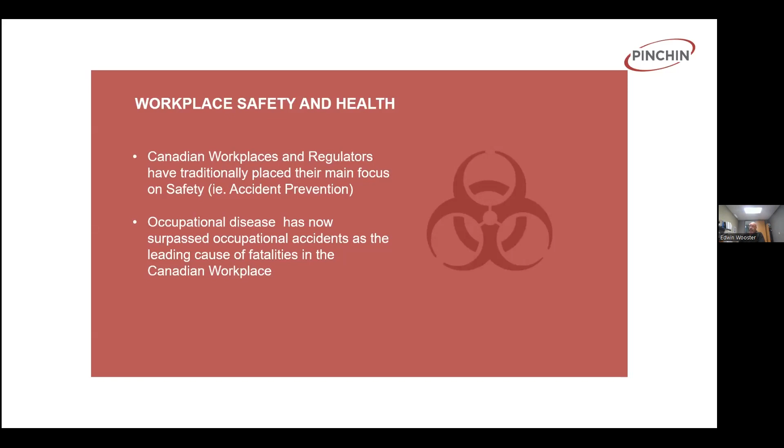And so now we're suddenly seeing a much stronger focus on occupational disease prevention than we've ever seen before in workplaces. In 2017, Workplace Safety and Health combined with Safe Work Manitoba came out with the Occupational Disease and Illness Prevention Strategy. This put a focus on trying to reduce the numbers of occupational diseases in the workplaces in Manitoba.

So from there, we look at regulations in Manitoba. From a workplace safety and health standpoint, we have the Workplace Safety and Health Act W210, and under that is the Workplace Safety and Health Regulation MR 217/2006. And so when we look at occupational disease prevention in the workplace, we're going to be focusing on Parts 2, 6, 33, 35, 36, and 37 of the regulation. Part 37 of the regulation is the asbestos regulation, and that's where a lot of the focus and attention goes when we start talking about occupational disease prevention in the workplace, because that's very specific to asbestos, and there's some very specific requirements under that regulation.

But then we have Part 36 of the regulation as well, which is chemical and biological substances, and that section regulates all of the other hazardous materials that we're going to find in a workplace. And so this is where we fall short in a lot of the workplaces, because under Part 36 of the regulation, anywhere there's a potential exposure to a hazardous substance in a workplace, you have to do a risk assessment and develop safe work procedures. There's requirements for engineering controls and exposure monitoring. And that's because they don't specifically spell out individual hazardous materials in Part 36 like they do in Part 37.

So, Edwin, yes, interrupting. We're noticing a bit of a delay in the PowerPoint screen sharing. It appears on our screen that the actual slide is kind of frozen without seeing all of the details. I'm just wondering if you can advance the slide forward to see if that's going to make it clearer from our perspective. Which slide are you looking at? It says regulations right now, and right now it looks like it's clear. Before it looked like there was one screen overlapping the other, but right now it's fine. Can you advance one more just to make sure that's fine? Okay. Yeah, on this screen regulations is fine, but underneath it, it almost looks like there's a grayish, and that's fine there. Whatever you did, that screen is clear. I moved my mouse. You moved your mouse. Okay. So this screen is clear. The one just before that seemed blurry, almost like a watermark color underneath it. It must have been my mouse. Okay, all good. I think we're good now. Sorry for interrupting. No, it's all good.

Okay, so under parts 36 and 37 of the regulation, in order to comply with the requirement to protect worker safety and health, there's the need to assess risks to workers, establish safe work procedures, and conduct exposure monitoring where there may be an overexposure to a worker in the workplace. There's a requirement to implement effective control measures to protect those workers. And then there's the requirement to conduct additional exposure monitoring to ensure that the control measures are working effectively.

Now, this is where things get a little bit fuzzy for a lot of employers, because it doesn't tell you how to go about doing this, and it doesn't talk specifically to the details of what we have to monitor for, or how frequently we have to do that. So this is where you end up with the need to bring in a competent person that understands it in those situations.

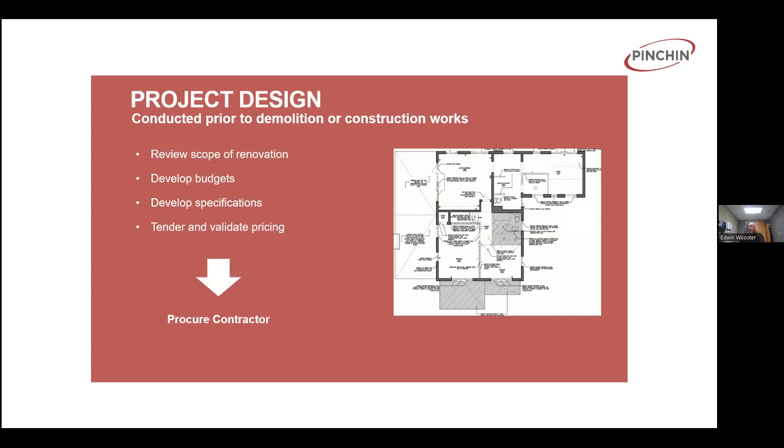And then once the work starts, MR 217/2006, Part 37 says that prior to any work that could release asbestos into the atmosphere, you have to actually notify the Department of Workplace Safety and Health at least 5 days before the abatement starts. And this is probably where some of you as contractors might be all of a sudden getting questions from Workplace Safety and Health going, was there a pre-renovation assessment done on this job?

Because what's happening is when contractors are pulling building permits for jobs, Workplace Safety and Health is being notified of these projects, and they're starting to follow up to find out whether or not these pre-renovation inventories have been done. So this is probably where some of these questions are coming up going, whose responsibility is it to have an inventory done, and what needs to be included in it?

Because all of a sudden contractors are being awarded jobs, and then Workplace is asking them, well, was there an assessment done? So Workplace is catching a lot of this through the demolition permits that are being pulled, but also when abatement contractors are putting in their 5 days notice prior to starting any projects.

There's the requirement to remove the hazardous materials in a safe manner, as well as to develop safe work practices for handling the asbestos, which means you have to have safe work procedures on site and developed for this work.

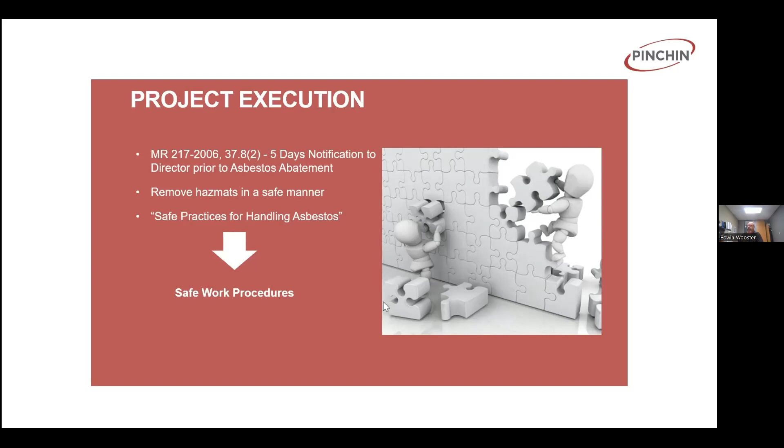Validation: you want to monitor the work to make sure it's being done in compliance with the procedures. This involves verifying the scope of work. It may involve air monitoring to make sure that the work is being done safely, and then verifying waste handling.

So, some of the concerns we've heard raised: there were a couple of projects where a demolition contractor actually got caught hauling hazardous waste out of town and dumping it in a farmer's field instead of hauling it to landfill to be disposed of properly. So tracking the waste, making sure it's actually going where it's supposed to, is an important part of this as well.

So this is where having inspection reports done during the abatement, documenting waste with waste manifests to actually show where it's going out, and even having a closure report at the end of the job that summarizes that everything was done correctly can save you a lot of grief.

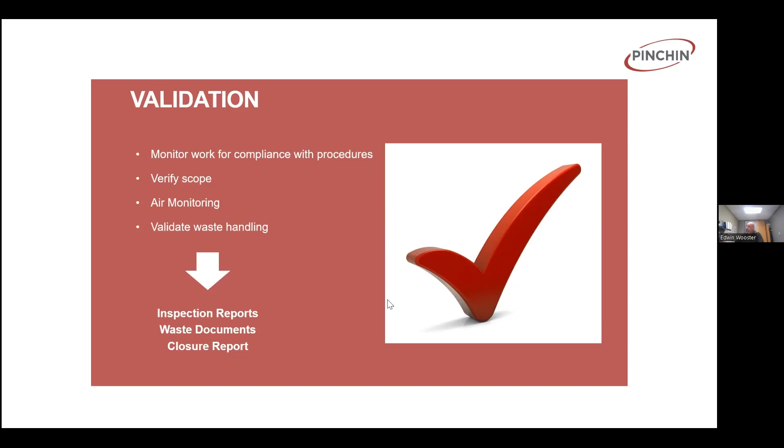So when we talk about abatement on renovation projects and some of the things that you need to be concerned of, asbestos is the big one, because Part 37 of the regulation specifically spells out asbestos and that you have to have an inventory done. But when it comes to the other hazardous materials that we're going to encounter in a workplace, it's going to be lead, whether it's paints, primers, in the bell and spigot joints, you've got the lead gaskets where it's poured in there as sealants, lead acid batteries and emergency lights. These are all things that we would be looking for.

Silica, it's in so many different products. Silica is the most abundant mineral on the Earth's surface. So we find it anywhere there's sand, gravel, concrete. It's in drywall, it's in plaster, it's in acoustic ceiling tiles. We encounter silica in so many different products. So that's another thing that we need safe work procedures for.

And it's one of those products that gets disturbed on a lot of construction projects. And there isn't a lot of monitoring that's being done with the silica. So there's a lot of exposures that go on with silica that slide under the radar. Mercury, it's found in fluorescent light tubes and in thermostats in buildings. So we want to identify those before any demolition occurs.

So when we talk about asbestos, some of the more common materials we're going to encounter in buildings are going to be fireproofings, floor tiles, ceiling tiles, sheet flooring, texture coats, mechanical insulations. Vermiculite is a huge one. Everybody thinks about residential attics, but hollow core concrete block walls are a common place where we find concealed vermiculite. And vermiculite can generate some very high exposures when disturbed in an uncontrolled manner. So it's something that we have to be very, very aware of when we encounter it in buildings.

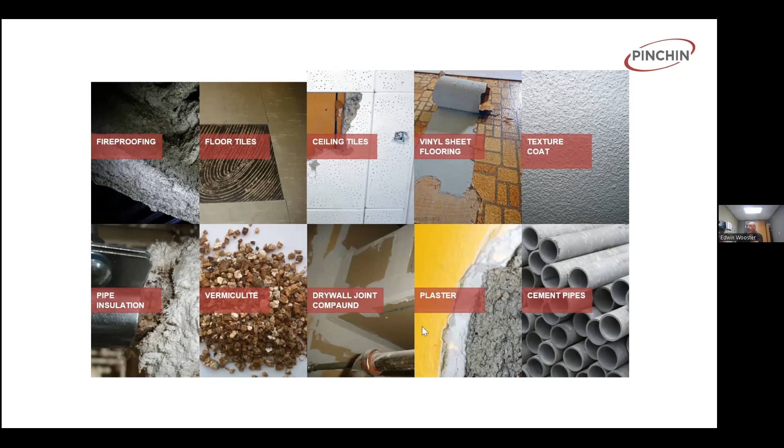Drywall joint compound, plasters, asbestos cement pipes, siding, and those sort of materials. In addition, mastics, glues, caulkings, and adhesives are all going to be suspect. Stucco finishes on the exterior of buildings, brakes and clutches, gaskets, ceiling tiles are all sources of asbestos that we find in the buildings. And you have to be careful because the guidelines say that at minimum you have to do an asbestos inventory for any building built before 1990, but the regulation actually states any building that may have asbestos in it needs to have an inventory done.

So from a management standpoint, we've seen some fairly significant enforcement on the older buildings constructed before 1990, but from a pre-renovation standpoint, the federal government did not ban the import and the use of asbestos in buildings until January 1st of 2019. So any building built right up until 2019 could legally have asbestos-containing materials in them.

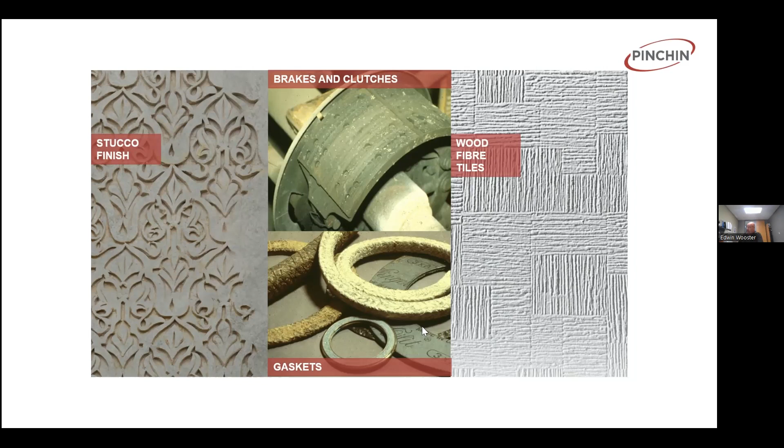Lead was added to paint for durability, and it adds pigment. Exposure to lead can affect brain development and damage primary organs. Activities that can cause exposure include building demolition, sanding, grinding, torching of steel, welding, and abrasive blasting. And it's in a lot of different coatings.

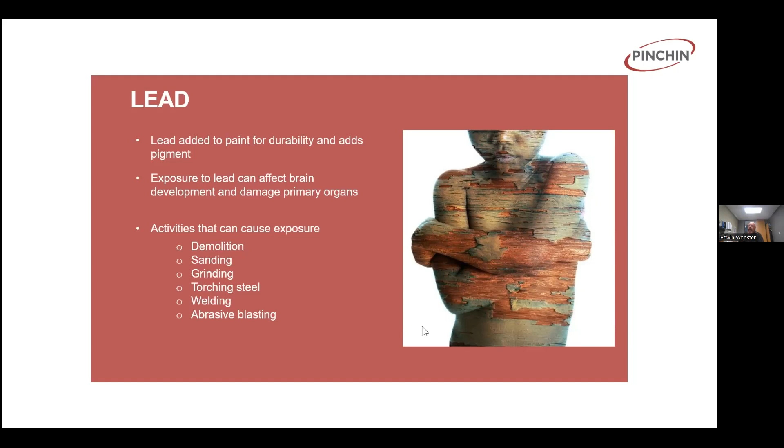When we look at lead in paints and coatings, this is another material that is misunderstood because it is still legal to have lead in industrial coatings in certain applications. So we find primers on structural steel, we find coatings on industrial buildings that still have some fairly significant levels of lead in them, even in newer coatings. So it's something that people are not necessarily always aware of.

Mercury was found in control switches, thermostats, pressure devices such as manometers, thermometers, and fluorescent light tubes. The challenge is liquid mercury is very difficult to clean up and it's very volatile. The mercury fumes are readily created under normal temperatures, which means that when they are disturbed in a building, it's hard to clean them up. They vaporize really easily, so the potential for exposure can occur quite quickly.

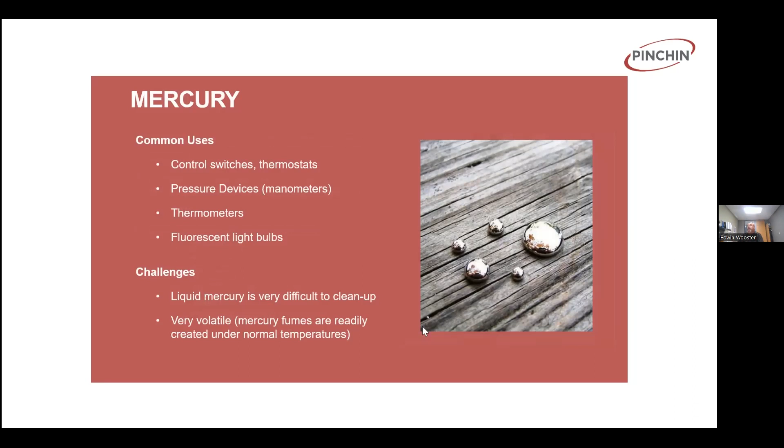PCBs were used in capacitors and light ballasts, and as fluids in transformers. We find it in hydraulic fluids. It was used in lubricants and caulkings. It was non-conductive, it transferred heat well, and it was a good plasticizer. So as I mentioned earlier, it made for pliable caulkings and adhesives.

And then some of the other materials that we're going to find. Silica. There's not a construction site anywhere in this country where you're not going to encounter silica dust. Silica was a big one. There was a fairly significant project in the news last week where there were issues with silica on a media blasting project.

Mold can be found in some of the newer buildings, right up to the older buildings. Anytime you have a water loss or any time building materials get wet, there's going to be mold issues or potential mold issues.

Droppings, this is another one. We get into derelict buildings, you're going to have pigeons and bats and rodents in there, but even newer buildings. Right now, fall is coming. I live in a rural area, and I've noticed this year there were a lot more mice in our community than we've seen in past years. With the colder weather coming, they're going to be looking for warm places to go. All a mouse needs is an opening the size of a pencil eraser to push through. So it doesn't take long to end up with rodents in buildings, and the deer mice carry hantavirus.

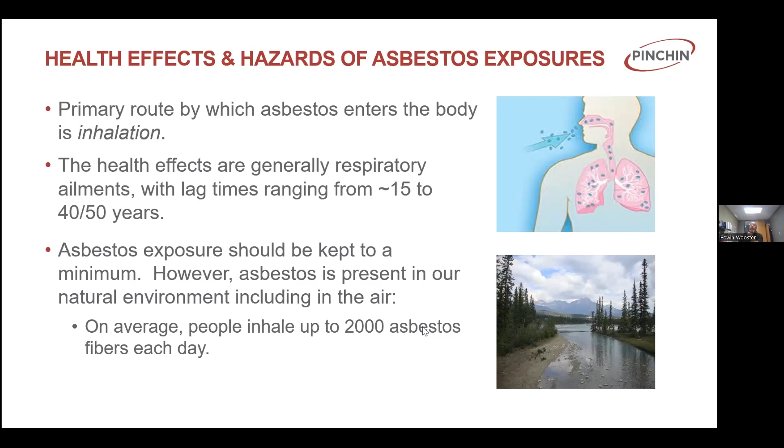Lead exposures can have negative effects on various body systems. They affect the nervous system. They can cause permanent nerve damage, tremors, irritability, depression, and even death. It can affect your bone marrow and your circulatory system, causing anemia and high blood pressure. It affects your kidneys. It can cause kidney damage and kidney failure, and causes issues with both male and female reproductive health, resulting in things like infertility, spontaneous abortions, birth defects, and sexual dysfunction.

When you become exposed to lead in the workplace, the lead circulates in your bloodstream for approximately a month. In that time frame, a certain percentage is going to deposit into your bone marrow. A certain percentage is going to get deposited in your soft tissue, your liver, your kidneys, the different organs, and they will house that lead. The bone marrow can house lead for over 30 years. Your organs can hold on to the lead for about a month. And then after that, your kidneys filter the lead out of your bloodstream and you urinate it out of your body.

Edwin, I'm just going to pause you right there. Your screen again is kind of locked up. Yes. So if you can just move... excellent. Thank you.

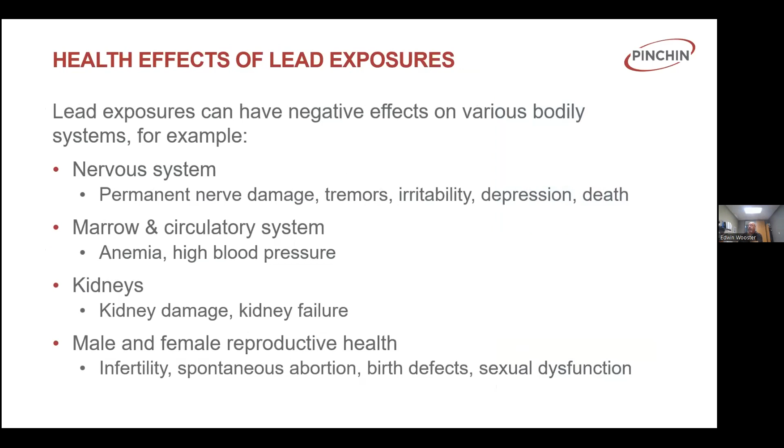So those are some of the concerns that we see with lead exposure. Lead exposure can be chronic and it can be acute. So depending on the level of exposure in the workplace, it can affect you. If you have a high level of exposure, it can hospitalize you very, very easily in a short period of time, but you can have long-term low level exposures that can affect your health as well.

Mercury evaporates at room temperature and the exposure limit is extremely low with it. Even small scale spills can lead to significant vapor levels that can be hazardous on a chronic exposure basis. Chronic exposures can result in neurological effects, tremors in hands, arms, legs, stomach aches, etc. At high concentrations, symptoms include shortness of breath, tightness in the chest, coughing, fevers, and sweating.

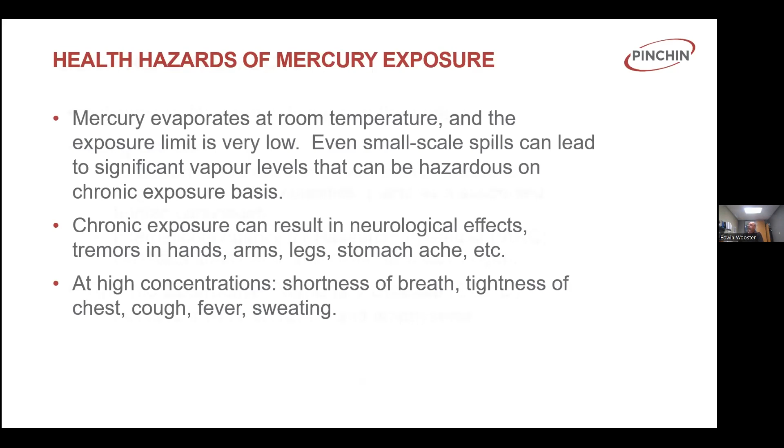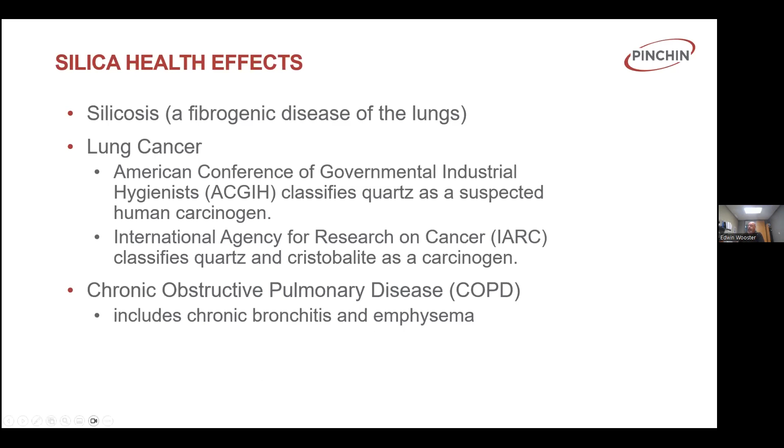Silica exposure is very, very similar to asbestos in that it causes scarring of the lung tissues. It is linked to lung cancer. And it can cause chronic obstructive pulmonary disease, which includes chronic bronchitis and emphysema. So these are examples of some of the health issues that can be tied to hazardous materials and why it's so important to address them in the workplace.

For assessments, it's important to understand there's different types of assessments that are out there. There is management assessments that are meant for the day-to-day management of a building. And then there's going to be pre-renovation assessments that need to be done for a building.

One of the things we've seen historically in the past is clients will have an inventory done for asbestos of their building. It's a management survey. They may not have it updated on an annual basis. And sometimes they'll give that to an architect or an engineer, and it gets attached to the back of a set of tender documents. And they'll have detailed drawings and specs for a renovation job. And then when it comes to the hazardous materials, it says asbestos is present in the building. See the attached inventory. Remove all asbestos in compliance with the regulations and guidelines.

That does not comply with the regulatory requirements for dealing with asbestos in the workplace. A management survey is only going to address the things that impact the day-to-day operations of a building. It's not going to be looking for concealed materials hidden in concrete block walls or above solid ceilings or in bulkheads and pipe chases necessarily. And so when we get into renovation work and demolition work, now all of a sudden you're doing selective demolition and you're opening up all these cavities that were not looked at as part of a management survey.

And then on top of that, the regulation states that if you have asbestos in your building, the inventory has to be updated on an annual basis. If you get a 4 or 5 year old document handed to you and go, here's the inventory for the building, and it's more than a year old, it's not compliant with the regulations. So it's really important to understand there's a distinct difference between a management survey and a pre-renovation assessment or a pre-renovation report.

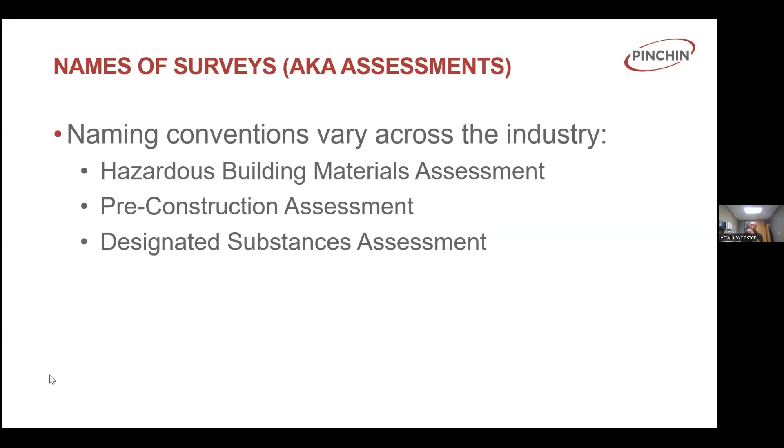So we talk about naming conventions. They vary across the industry. You're going to have people talk about hazardous materials assessments, pre-construction assessments, designated substance assessments. These are ones that are looking for multiple hazardous materials, not typically just asbestos. We talk about management level assessments, as I mentioned. They're used for long-term management of materials, which is going to be predominantly asbestos. Some clients will have full hazmat surveys for a management standpoint, but it's not common. From the day-to-day management of a building, it's the asbestos that comes up in the regulations as being a specific requirement. So that's the one we see most frequently.

It's typically going to have many exclusions for materials that are covered in the scope of work. It's not adequate for planning renovations, demolition, or other major work. And all accessible interior areas are going to be assessed with limited review of the exterior of the building. Because we don't want to be damaging things like building envelope seals, roofing membranes as part of a management survey, because they could lead to mold issues and other problems in the building.

But prior to renovation or demolition, you need to have pre-construction assessments done. They're going to be project specific. They're going to be dealing specifically with the scope that is dependent on the renovation work that is being completed. Only the areas impacted by the renovation work are generally going to be assessed. And the exclusions on them are going to be very, very minor. We're going to be trying to avoid having stuff listed as, oh, we didn't look for this and that, because we don't want surprises once the renovation work starts.

When we prepare reports, our reports are going to have an executive summary, which is a quick snapshot of the hazardous materials that are present. And we find that a lot of people never look past the executive summary. But there's usually lots of information that can be found in the body of the report. The body of the report is going to give you more specific information on the hazardous materials, including the quantities and condition that you're going to find.

And then the recommendations are going to show what needs to be done from a management standpoint, because when we go through a building, there's going to be damage. We may encounter damaged materials that are going to need to be dealt with, whether they're part of the scope of the renovation or not. And then it's going to have specific recommendations that are going to be tied to the materials that are going to be impacted by the renovation or demolition work.

Drawings do not always show all of the hazardous materials. So it's important to look at all the other data that's included in the report as well. So all parts of the report need to be read, not just the executive summary and the drawings, when you're looking at a pre-renovation report.

The pre-construction and pre-demolition assessments are very important, because in order to comply with the requirements of the regulation, they need to be included in the tender packages for pricing the work. They need to ensure that relevant hazardous materials are identified and are going to be properly removed as part of the planned work. And the main goal is to protect not just the public, but the renovation workers from exposures during the work.

Occupational disease, the numbers are really high. We're seeing a lot of people impacted annually. Historically, Manitoba sees 10 accepted claims a year for asbestos fatalities. A third of the fatalities accepted claims by Workers' Compensation Board in Manitoba annually are asbestos-related fatalities, and that's not including silica and other occupational disease exposures.

So it's really important that these things get clearly identified up front as part of the renovation work, so that we can make sure that we develop proper scope of work, proper safe work procedures to ensure that the work gets done safely.

For pre-construction, demolition versus management, from a pre-construction, pre-demolition assessment, the following materials may be investigated for and sampled depending on the scope of work. And it's unlikely that you're going to find these in management grade surveys. Roofing materials. There's roofing felts, tars, asphalt coatings, sealants on roofs that can have hazardous materials in them. We're finding asbestos, lead and PCBs on roofs.

And one of the things we hear is, oh, well, the roof was replaced in 2004, so we don't have to worry about it. But if you actually think about it, if they replaced the roof in 2004 and they stripped it right down to the concrete deck, did they scrape every last bit of tar off the deck below all the roofing felts? Not typically. And so what we're finding is a lot of newer roofs that have a layer of asbestos containing tar on the deck itself that wasn't removed as part of the roof replacement.

So when we get into coring holes through roofs or doing roof work, there's tar coatings on roofs that get missed because they did a roof replacement. Nobody thought to look under, to see what was underneath it.